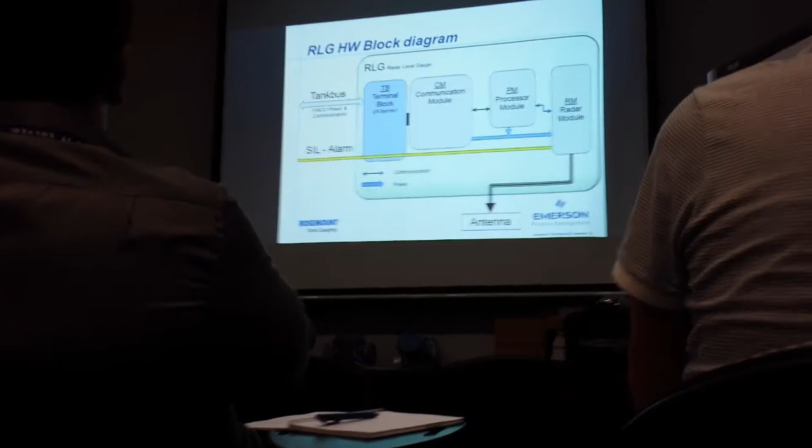Okay, now you can see what the difference is when it comes to the 5900. I mean, you remember the FFT and the SIL and so on, right? This is the block diagram of the complete head. What is inside to the antenna? This is what it looks like inside.

We have our tank bus, 2-pair cable, connected to the terminal block, and this is then connected to our communication module to distribute the power and the communication also. And the power is distributed to the different boards, and the communication is also existing between the different boards here. So we have a communication module, a processor module, and a radar module.

So you can say that we have 3 different boards inside, molded together in one nice package. You cannot remove any CM or PM or RM. You can just remove the complete package. You cannot, like a Rex gauge, remove the SPC card and so on. That is not possible with the 5900. It's just a complete package.

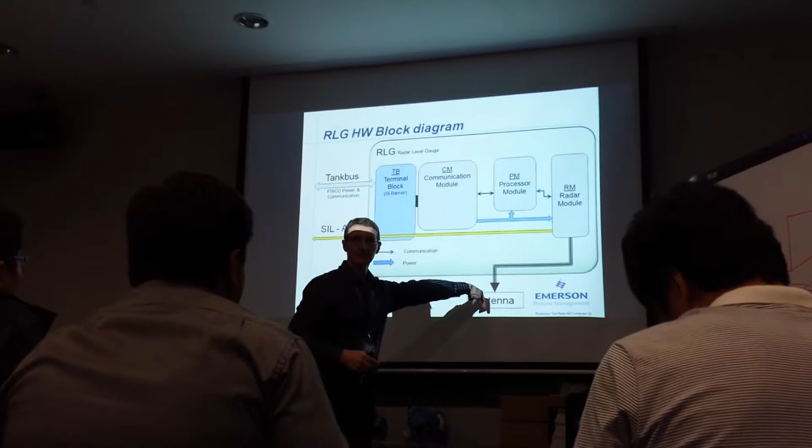So here we have the radar module, and that radar module is of course connected mechanically to the antenna. If you have a 2-in-1, which is a patented new thing in the 5900, you have 2 exact identical modules. Both modules will be connected to the same antenna. Have you opened up the 5900 to have a look inside? Yeah.

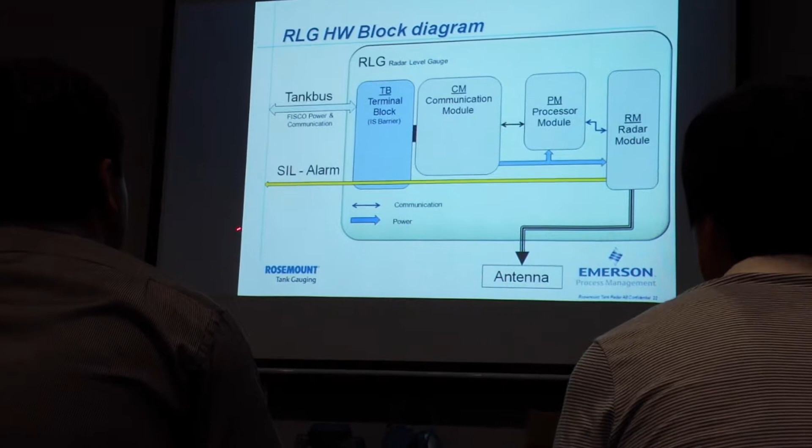So you see, we have also this SIL functionality. It means that we have one direct link out, and you connect the cable from the gauge to the hub. This yellow line here, this is the SIL cable. See, this is yellow, that is yellow. So it's a direct line, and it's just hardwired directly to the radar module.

And that's the SIL. So if you have a SIL 3 gauge, like we have on the table, which I'll make a demonstration later on, when we say that we have a 2-in-1 gauge, it's not quite true. Because we have actually 4 gauges in one. Because this complete module and the level you get out here, that's one radar. The second radar is this one. So that is also a radar.

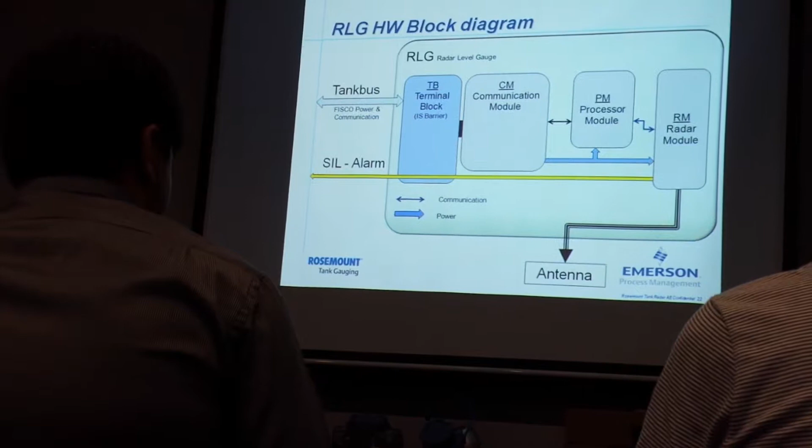When you do a configuration of SIL gauge, we say we have SIL 2, it means require only one. We call it 1-in-1, 2-in-1. So 1-in-1, we have 2 gauges. First you configure normally by installing the device in WinSetup. And then, when you've done that, you go to the safety alarm configuration. That configuration is only done here.

You have actually 2 radars you have to configure. So this button you push where it says safety alarm, then you go into this one and do the configuration. Because when you do the normal configuration, you say that, okay, I have this antenna, that is the reference height, blah, blah, blah, and the type of tank and so on. You do it here. Safety alarm, you have to do the same thing there also.

But it's more primitive. It's like the old TRL2, or the very first. It's numbers only. It's no tank scan, nothing. It's only numbers you have to enter. So then you do the safety configuration in the radar module also. And then this is keeping track of overfilling. If the level comes to your set point, immediately it will trigger this one. And then you have an alarm out from the pump.

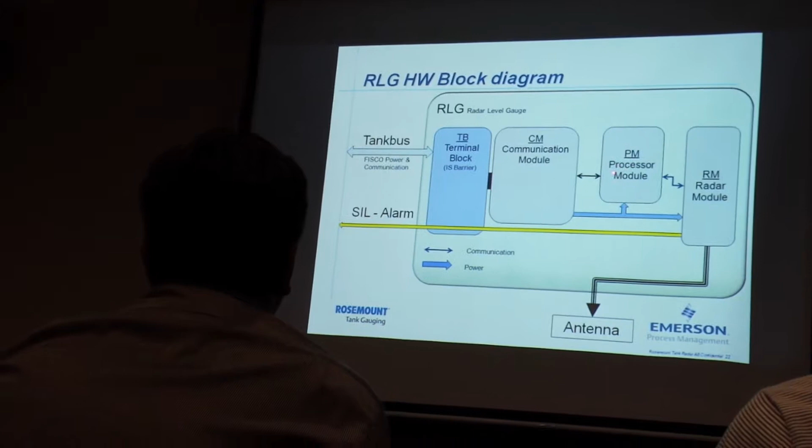You've seen this before? We have a boot application. Yeah. But we have boot in RM and PM. So it means we have boot and application. And we have boot and application here also.

This afternoon, when I present you the SIL configuration, I may take the theoretical part a little bit quick, because that is just showing you exactly what you have to do to configure SIL. Because I will do a practical demonstration of the SIL also. Since we have only one SIL gauge, the idea was first that you try it in the lab group, but we couldn't get 5 SIL gauges. So I decided I will connect my laptop and do a live session, right?

Then I had a small idea that if we have time after this demonstration, I will take a small portion and tell you what SIL is all about. Make another presentation which will tell you about SIL itself, not how we configure our gauge, but SIL in general, if you feel that is interesting. But we'll check that after the demo. Okay, back to this one.

So it means we have a boot and application software here also. So our safety. Yes, earlier slide. 5900. This one file contains boot and application. So it contains all 4 files. But the program will be tied with the SIL. It's related. The software in this one is related to the SIL,

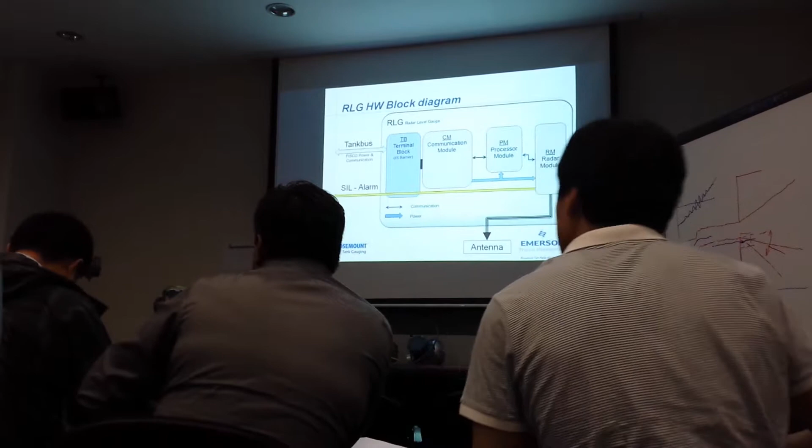every time we have this gauge SIL certified, there is a second authority which approves this. The company name is Exida. They have come to us and checked how our boot works, everything. It's a big job to get this gauge design approved for SIL 3. Very big job. It means every time we make a hardware change related to this part, we must do a theoretical analysis: what will be the risk? And we have to send papers, and they have to look and say, okay, you're still SIL 3.

Also software. If we change software here, only this portion is related to the safety. If we make any changes to the boot and application here, we also must go to Exida and say, please look at the change, is it okay? And if they say okay, it's okay. So you can imagine it takes a long, long time if we make just one change in the SIL area. So we don't want to start.

That's why we have separated the normal application, because that has nothing to do with SIL. So this software we can improve, upgrade, and so on. If you look at the software versions in the radar module and the processor module, they will be different. The radar module software will stay the same, because we don't want to touch SIL since it costs a lot of money. The PM can have different versions, but the RM stays the same version, because it's all related to SIL. If we must do it, it will be a big procedure to change SIL software.

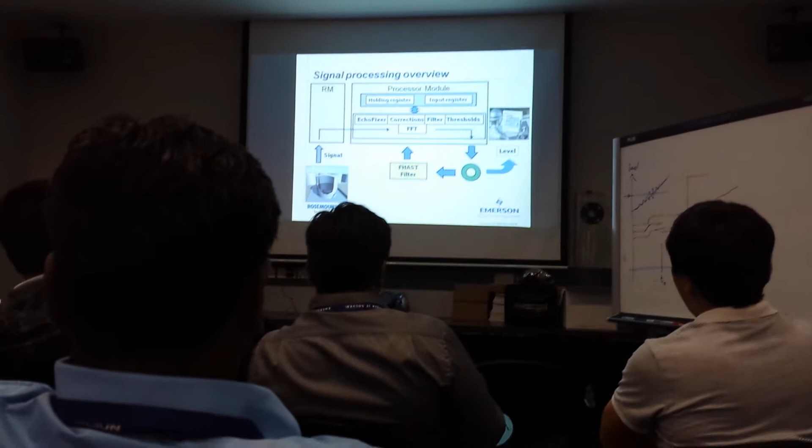Here comes our signal processing. As you see here, this is a little bit different. You have this radar module separated from the processor module because they are two different cards. But it's still the same. The only thing is that when this is not transmitting, it's more or less going into idle, so to save energy, it stops. Then when the processor is requesting level, it will send a command telling this one, please give me a signal, and then it will send back the signal.

When we have a SIL gauge, then also this gauge will take the same signal and make a node processing and check, do I have a high level alarm triggered or not? If not, nothing. But if you have a high alarm situation, then this will immediately take the SIL alarm to the hub and say, please activate it. So this is how it works.

So this is commanding the radar module to make a sweep. And then this will send back the sweep. And then you have the normal procedure here with the FHAST filter and level and so on. So that is the difference. Yes.

No, it's because PM needs to give the normal level to the operators and see what it is. But if you bought the SIL gauge, then you also activated the SIL relay and the functionality. And then, when this is commanding a sweep, this is doing the sweep and sending the sweep to the PM, but it's also making its own calculation, but only when you have SIL activated. Otherwise, it will be a command from PM, make a sweep, and send back the sweep, nothing.

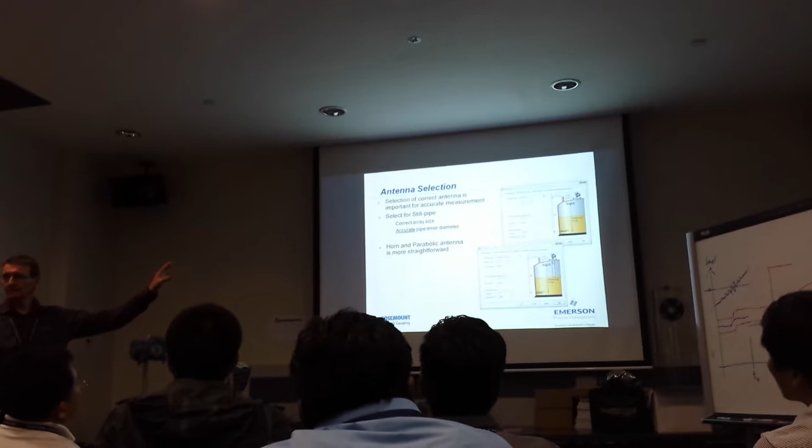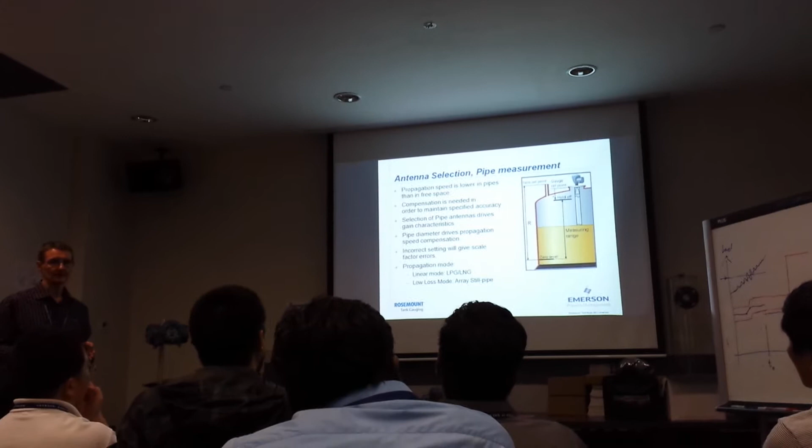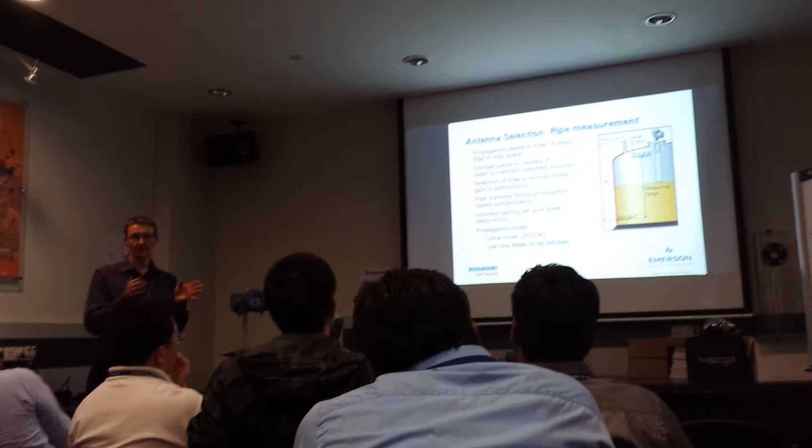Okay, antenna selection. I think all these pictures you can see in the configuration, so there's nothing strange. One thing I want to mention is that when you have pipe measurements, when you select a pipe antenna, it's very, very important to have the very exact inner diameter of the pipe. Because based on the inner diameter that we put, we adjust or compensate for the speed inside the pipe. And this way we get the correct level.

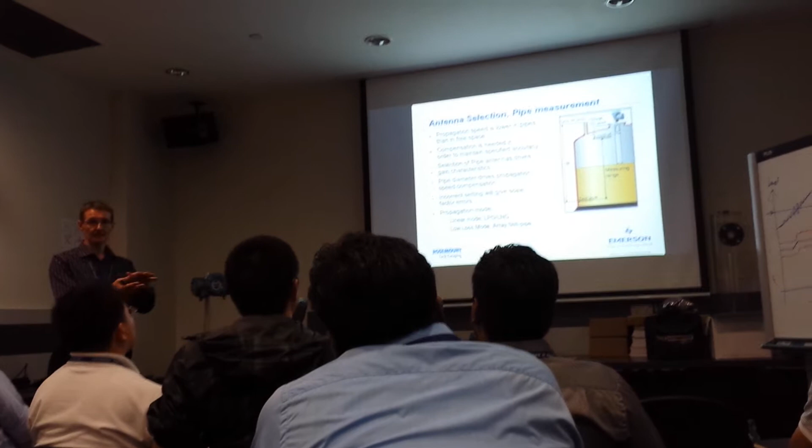But if you have one pipe with 200 millimeter diameter inside, and you say it's 216, the gauge says, okay, it's 216, but in reality it's 200. So when you make a hand calibration, at the point where you make the calibration it will be good because you calibrate. But when the level goes up and down, then you have a positive or negative error above and below because the pipe diameter is not correct.

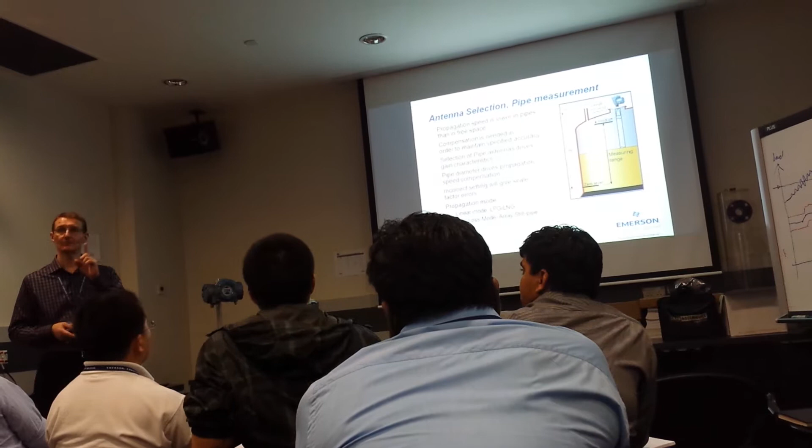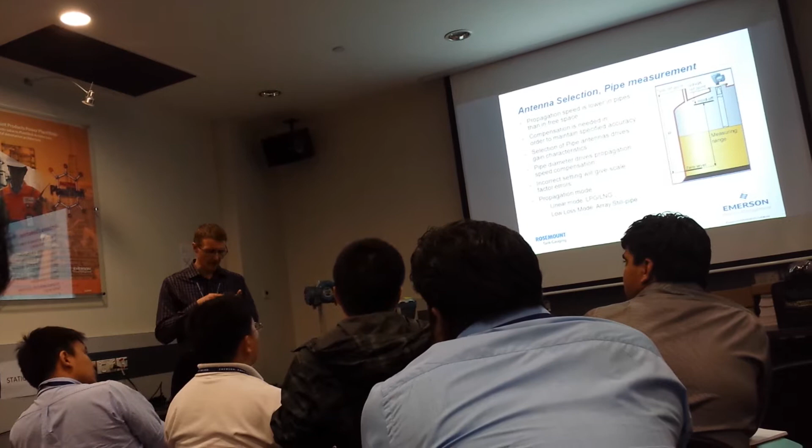So that is important. Make sure the pipe diameter is very, very accurate, double check it. Not just say it's an 8-inch pipe, okay, 8 inches, okay, 203. It doesn't work like that. It should be done accurately. Okay, usually define antennas and things like that. Just quickly about this filtering, what's happening, and then we go forward.

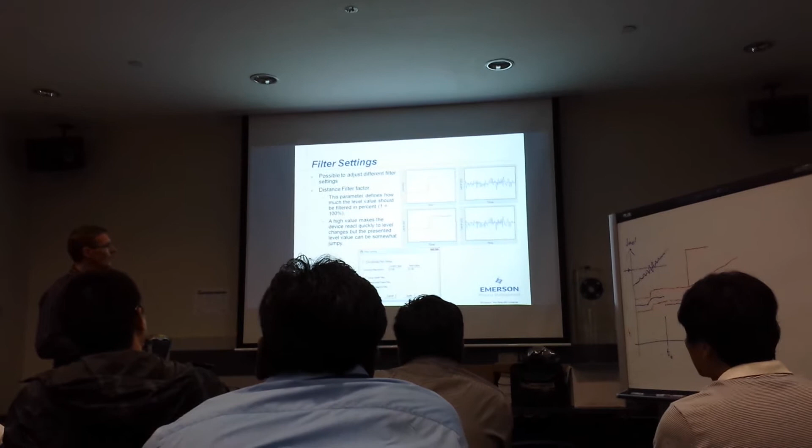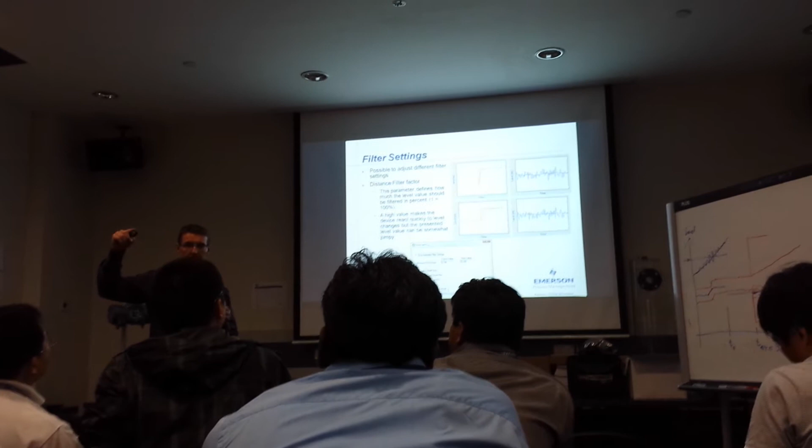Level filtering. So the distance filter factor, when you have a value of 1, it means we have no filtering on the level. So if this blue line is the actual level change happening, then when you apply filtering, the percentage value is the red line. So if you have an unstable surface like this, this is what's happening in the tank, and the red line here represents the percentage as you as an operator see it.

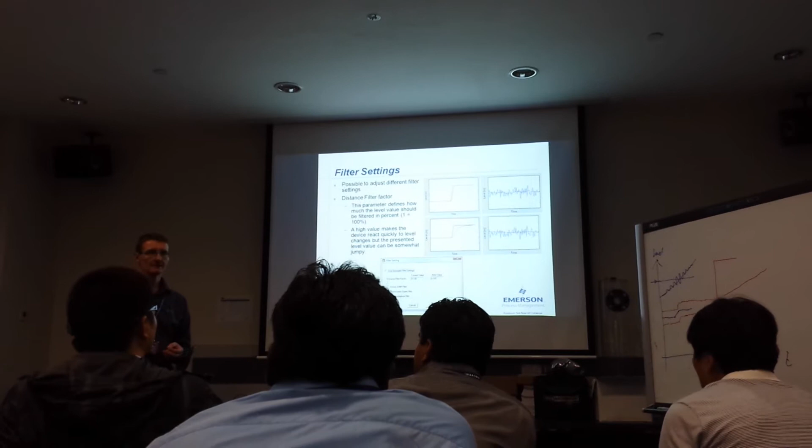When you decrease the value actually, 1 is no filtering and 0.005 is max filtering. It attenuates, dampens the signal max. Then the response will look like this. So this is the actual happening, and this is the response. So it means that this level is much, much smoother. So that's what happens. Okay. Good. Questions? Anyway, when you get the presentations, you can have a look at the facilities later on.

Now, Elan, time for lunch, right? Yeah. Okay, very good, if you are done.